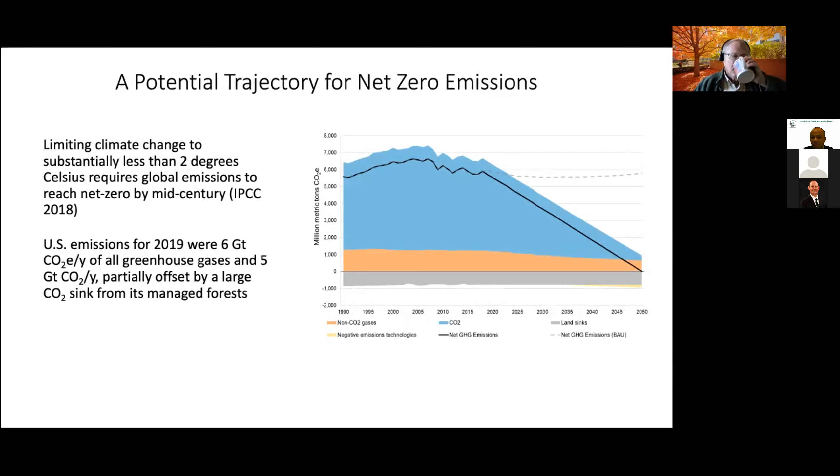Now, one of the things about going on a trajectory like that is it's going to result in a whole series of job losses, but also job creations. And so the net zero pathways that I'm going to be talking about have enormous implications for the types of employment that are going to exist. There will be job loss in the petroleum and coal industries unless carbon capture and sequestration really improves. There's going to be job creation for renewable energy, power transmission lines, carbon capture and storage, vehicle charging, building energy efficiency, and research to improve the innovation toolkit. So there are going to be many new opportunities for graduates, not only in the United States, but also worldwide.

I'm going to be talking largely off of a study that I participated in as a committee member. This was sponsored by the National Academies of Sciences, Engineering, and Medicine. And the study came out in January of this year. It was titled Accelerating Decarbonization of the US Energy System. I'm only going to be talking about a portion of the study that pertains primarily to transportation.

So the study focused on near and midterm high value policies, research investments and approaches. We're busy working on a second report now as a committee, and we hope that will come out in 2022. It'll take a look at more things, and in particular, it'll look at non-federal actions, so state, local, and private actions. The study itself was sponsored by foundations and from the National Academy of Sciences President's Fund.

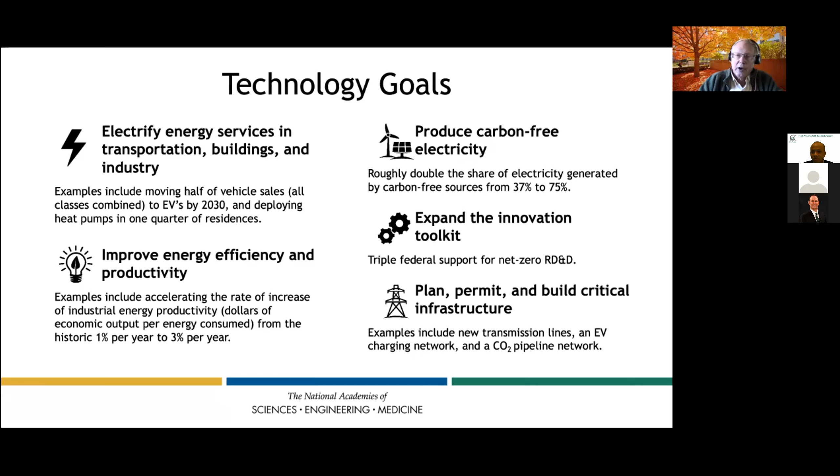Expand the innovation toolkit and plan, permit, and build critical infrastructure. That's important because infrastructure takes a long time to build, to permit, and it lasts a long time. So we have to get going on what infrastructure we need for the new decarbonization world.

At the same time as pursuing these technology goals, the report emphasized that we also have socioeconomic goals to pursue. First is strengthen the US economy. Second is support communities, businesses, and workers. I mentioned in terms of strengthening the US economy about building up manufacturing capabilities. Supporting communities that are going to be adversely affected by the transition is also important. Promote equity and inclusion in pursuing these changes, and maximize cost effectiveness, which I'll be talking about throughout this talk.

So the context of this talk: net zero carbon emissions by 2050 for transportation modes. Given the fleet turnover time and infrastructure longevity and research times, this next decade, I think, is critical for us to be getting onto a net zero trajectory. I'm going to focus on the United States, but certainly the actions that I'm going to be talking about are relevant to other countries. For example, China has pledged to be net zero by 2060, and other countries are also making pledges.

I'm going to focus on transportation, but I'll say a few things about liquid fuel and vehicle production. These are actions that are relevant for all carbon generating entities. I should also mention that I'm going to be drawing from the National Academy studies, but there are a whole series of deep decarbonization studies that exist. They have different geographic frameworks. Some are global, some are regional, some are national, some are statewide. They have varying timeframes and goals, varying attention to cost, milestones, and policy options. They're often scenario-based, so that different scenarios are proposed.

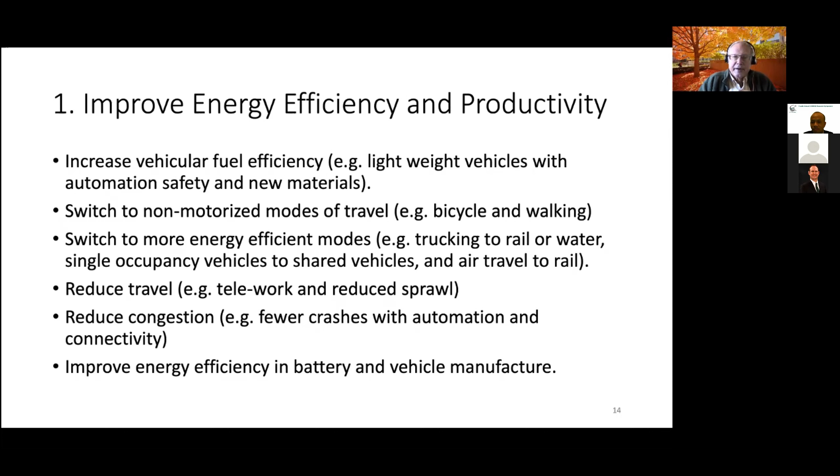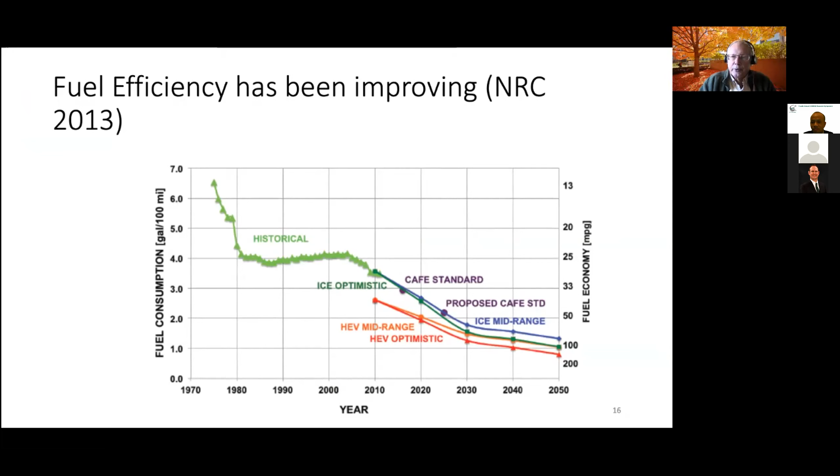And it's in the historical record that fuel efficiency improvements are possible. Back in the 1970s, there was a big improvement in fuel economy. Then it kind of lagged for a number of years as motor vehicle manufacturers pursued different things like power. And then when regulations like the corporate average fuel economy standard came in, you started to see more declines. And you can see this graph goes from 2010 up to 2050 and forecasts that more fuel economy in conventional vehicles is possible.

Now, the costs of these energy efficiency and productivity measures vary a great deal. Some of them have both private and social positive net benefits, but they typically require a capital investment followed by cost savings. That's becoming the case, by the way, for fuel efficient vehicles such as battery electric vehicles.

Some of them are inconvenient or risky. A good example right now is transit. In the pandemic world, transit ridership has really dropped, and it'll be interesting to see what happens with shared ride service in a post-pandemic world. There are lots and lots of ways to pursue energy efficiency and productivity, lots of policies available. That includes standards, tax incentives, grants, procurement requirements, and others.

So, second strategy, electrify transportation as much as possible. Plug-in battery electric vehicles are something that we hope will become dominant, especially in urban areas where there are shorter trips. One of the questions here is whether fuel cell vehicles can become competitive with battery electric vehicles for long hauls. The fuel cell vehicles typically have larger range. We need charging and hydrogen infrastructure to provide motive power for these battery electric vehicles and fuel cell vehicles.

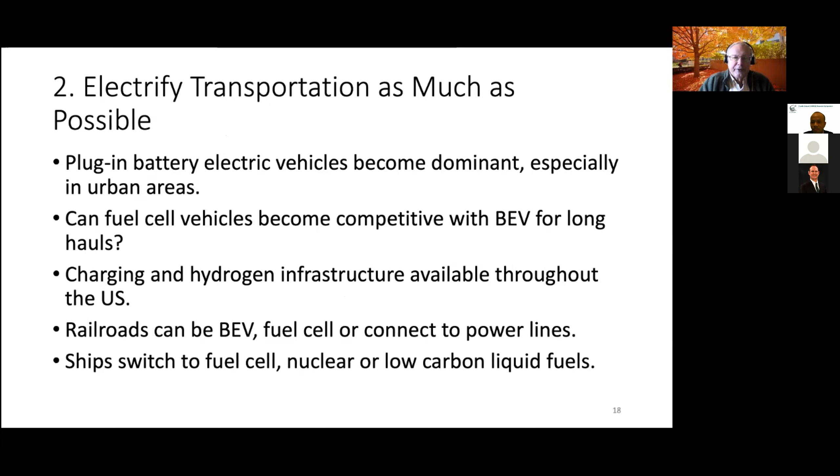And then railroads need to switch over. They're diesel electric right now. They could be battery electric. They could be fuel cells, or they can connect to power lines. Ships can switch to fuel cells, nuclear, or low carbon liquid fuels.

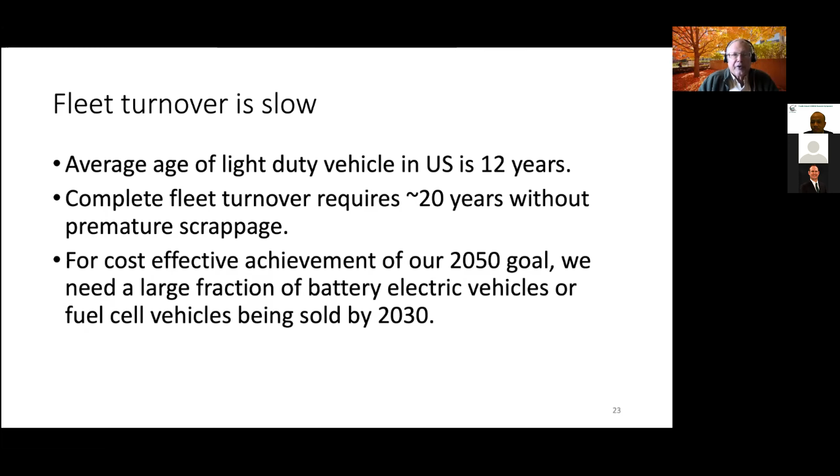And of course, the reason that we need to emphasize switching over as soon as possible is that fleet turnover is very slow. The average age of light duty vehicles in the US is about 12 years. Complete fleet turnover requires 20 years without going through some premature scrappage. So we need to get a fairly significant fraction of battery electric vehicles or fuel cell vehicles being sold in the next decade.

So decarbonized power generation. This is closely tied, synergistic with the transportation changes for electrification. And there are various ways of achieving this decarbonization. We can increase the renewable power generation share, that's solar, geothermal, and wind. At the same time as doing that, we need to make sure we have a stable supply of power. Typical means of doing that is to have batteries or pump storage available that would provide electricity, say when solar is not available due to the nighttime.

We can try and preserve nuclear generation of power. And we can transition coal-fired and gas-fired power plants to a regime of carbon capture and sequestration. That technology exists. It's expensive, but it's certainly a possible course of action.

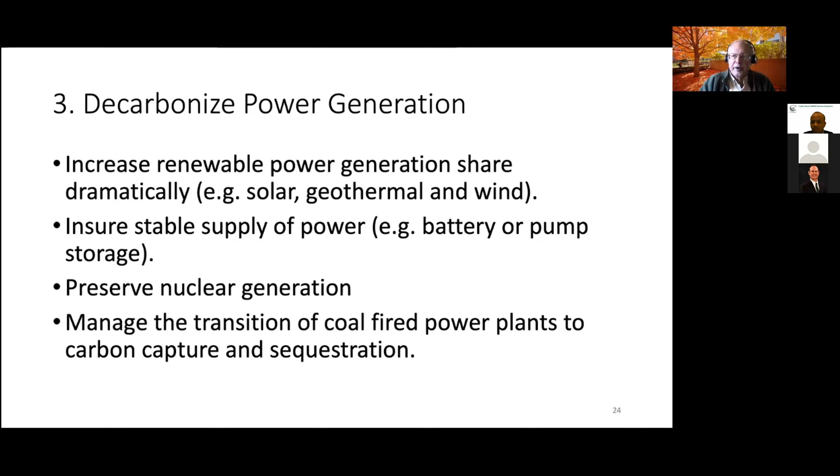And the non-fossil share of energy has been increasing. It's 20% in 2019. Showing on this graph, you can see that petroleum is still a big portion. Natural gas has been growing. Coal has been shrinking as a proportion of energy. And the non-fossil share, nuclear, wind, biofuels, hydroelectricity, have all been increasing. And so we want that increase to keep going on, and we want to move natural gas and coal to carbon capture and sequestration if they continue to be part of the energy mix.

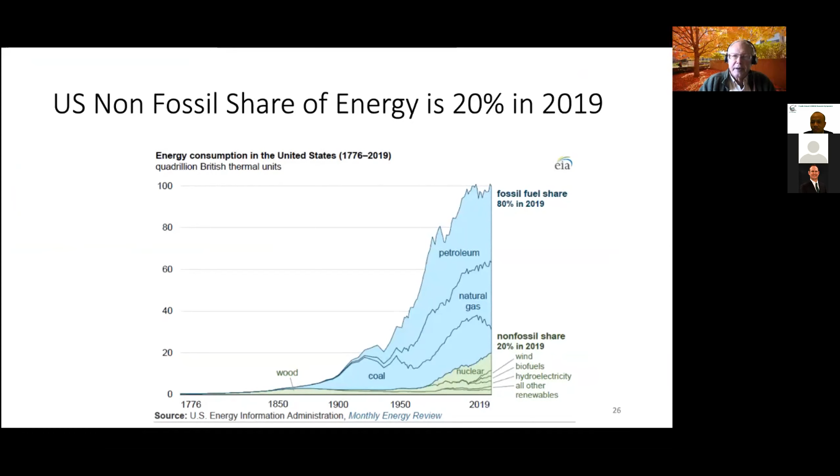And there've been a whole series of studies on power decarbonization, and I'm not going to go into them all, that suggest that the sort of changes that I'm talking about can be achieved without enormous cost. This is a graph of energy system costs as a percentage of gross domestic product. And you can see it's the historical record up until about 2018. And then there are forecasts going forward from various studies that suggest that this decline should be able to continue or at least stabilize in the future.

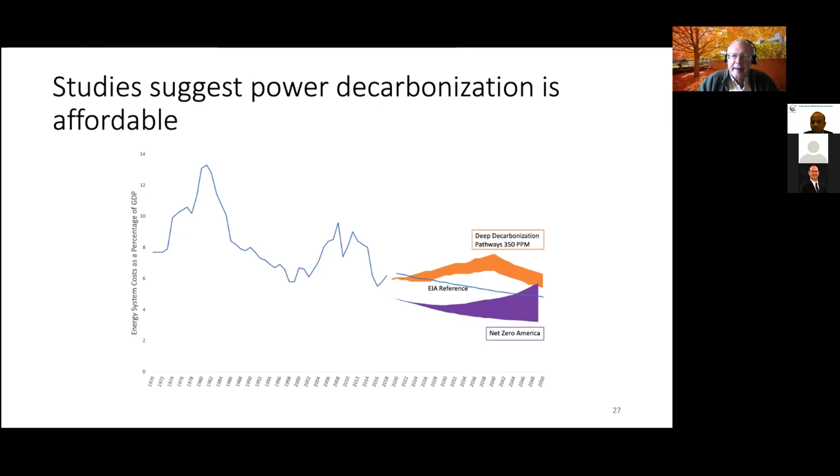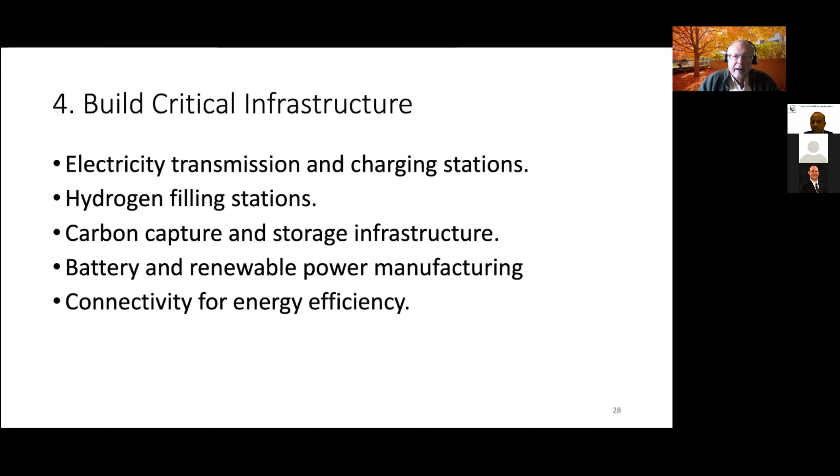Another portion or action that we need to take going forward is to build critical infrastructure. We need electricity transmission and charging stations. If we're going to have fuel cells as a competitive alternative, we need hydrogen filling stations. I've already talked about carbon capture and storage. We need manufacturing for batteries and renewable power. And we need to build the infrastructure for connectivity if we're going to pursue that action.

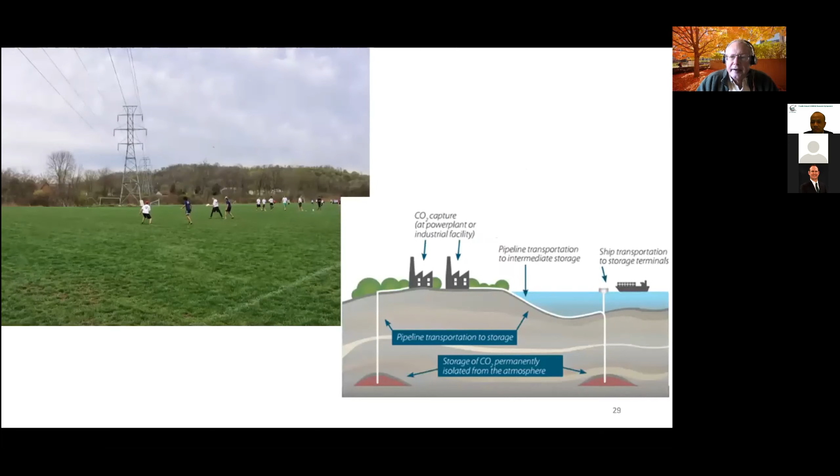And just a couple of examples. This is a transmission line, and one of my sons playing ultimate frisbee underneath the transmission line. On the right is a typical scenario for carbon capture and storage. The carbon dioxide is captured at the power plant, piped, and then stored in sequestration underground.

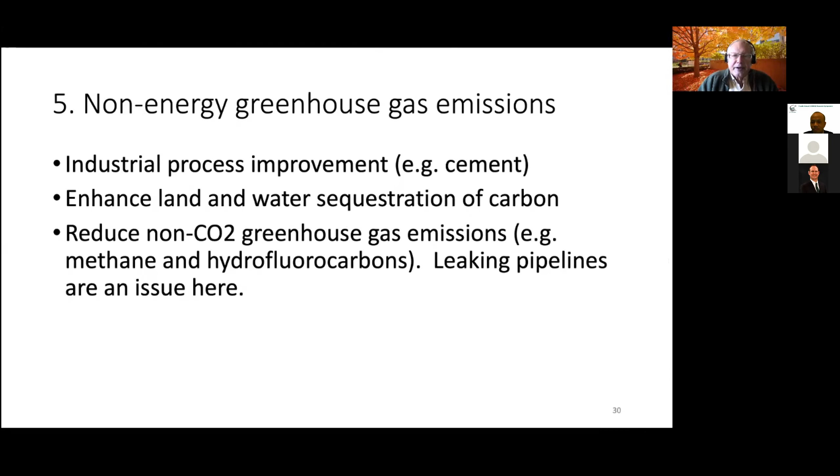Non-energy greenhouse gas emissions also have to be tackled. We need industrial process improvement, in particular cement, which of course is an important input into transportation infrastructure. We'd like to enhance land and water sequestration of carbon. That's going to require some transportation. And we'd like to reduce non-CO2 greenhouse gas emissions, in particular methane. And leaking pipelines are an issue here.

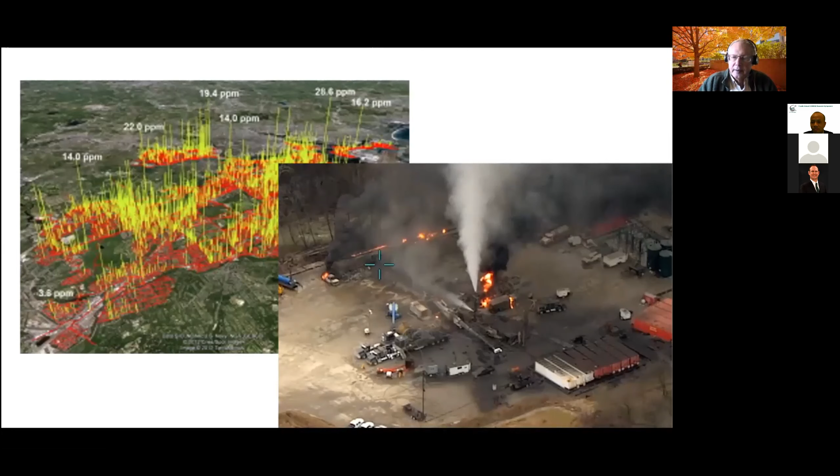Let me just give you two examples. One on the left is a study of Boston methane leaks, and you can see that the old aging pipelines in the Boston area have quite a bit of methane leakage. On the right is an incident where a pipeline is blown out and fires are occurring, and quite a bit of methane is escaping to the atmosphere. Again, for both of these, we'd like to reduce these leaks and incidents as much as we can.

And then I think I'm talking to a number of researchers, so I thought I should talk about useful innovations that we need to pursue. Zero emission hydrogen production. Right now, most of our hydrogen is coming from fossil fuels. Synthesis of low carbon liquid methane and liquid hydrocarbon fuels. This is going to be important for air transport. It's really hard to electrify long distance air travel. And so one alternative is to use these low carbon liquid fuels.

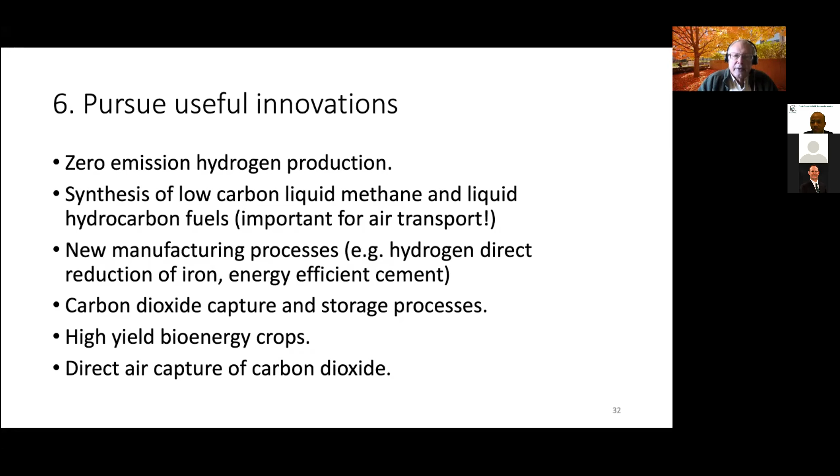New manufacturing processes, hydrogen direct reduction of iron, energy efficient cement. Carbon dioxide capture and storage processes are something that we need to work on. High yield bioenergy crops, again, need some research and deployment and development. And direct air capture of carbon dioxide. I mentioned that right at the beginning of my talk. And that might be an alternative to things like low carbon liquid fuels for long distance air transport. If that could be offset by direct air capture, that might be a viable alternative.

So I've given you 6 action areas for moving forward. They're not easy, but they're technically feasible. Each of them suggests that there are going to be major implications for transportation and for transportation professionals like us. And I should emphasize that the socioeconomic goals that I put forward right at the beginning are also critical here for doing things.

There's a consensus that's emerging from a lot of the studies that net zero emissions has many technically feasible pathways. I mentioned that there are all sorts of studies and they tend to move into a consensus. Transportation electrification is a critical element, but many other actions can contribute. Battery electric vehicles are currently less costly than fuel cell vehicles, but suffer from limited range and charging availability.

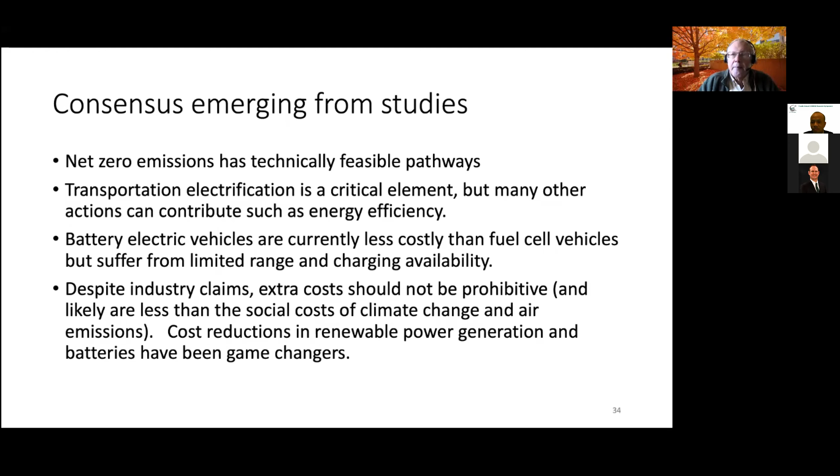Despite industry claims, extra costs should not be prohibitive and likely are less than the social costs of climate change and air emissions. Cost reductions in renewable power generation and batteries have been game changers for the feasibility of those actions. I mentioned at the beginning that we're still working with the study committee on a second report.

I'd be interested in any of your suggestions. We're thinking about additional topics like agriculture and public health, more interest in water, and a broader range of actors. Rather than just doing federal, we should include state, local, private sector, non-governmental organizations.